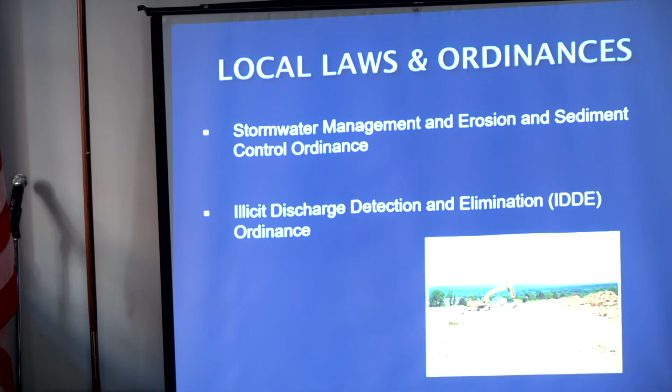Is that still a little fuzzy? Did you figure out where the focus is? No. Aaron, where's the focus? Still seems to maybe, well for us...

Everybody loves the erosion model. Yeah, it was a fun table, right? Having a stream table there.

Okay, you found it. There's like a fine spot, oh right there, right there. That's sharp, it's like very small.

We bought that, you know. So you got here before we put it out, and then couldn't do anything with it. Now we can put it out.

I was hoping they'd give us two polls. Did my signal go through? Then it would be like, yeah, then we would know, differentiate which one was ours.

Walter, how are you? Too bad, hanging in there. Good, thanks.

It wasn't out by last week, it ain't gonna be out till January. You know how that goes, that cycle of things. If they wanna feel real good, it comes out in the end of October. If they don't care, you'll see it in January.

Oh, the mail. I know.

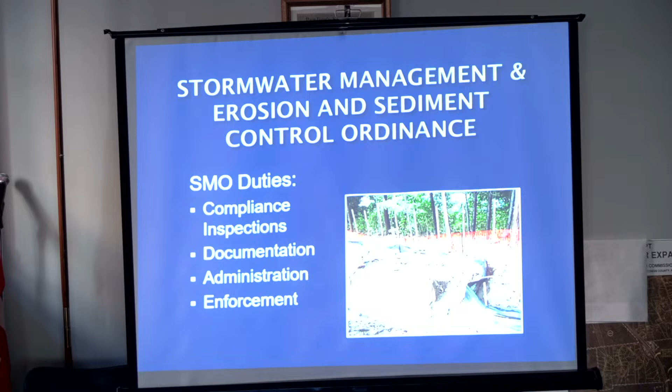As far as SWPPP compliance inspections conducted by the town, the SMO, or the CEO, they are required as per your MS4 permit. However, the frequency is at the discretion of the MS4. It might be based on the scope of the project, whether you have sensitive areas, wetlands, steep slopes, whether it's a large site, multiple phases. In some cases, it may be due to the contractor on site requiring more frequent inspections.

So they may be regularly scheduled, such as weekly or bi-weekly. They could be random after significant rainfall events, or a lot of times it's also the result of a complaint.

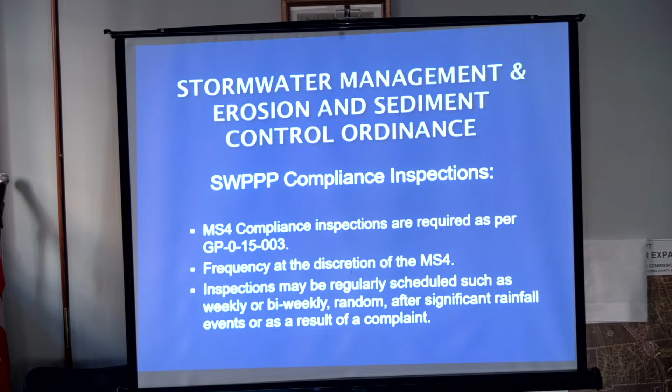Documentation, again, is a big part of this, the MS4 permit while you're doing compliance inspections. That is only going to get, as I stated, more intense as this permit, if we see a new permit sometime probably in 2024.

You're required to document all your compliance inspections. When you come to submit your annual report in June 1st of every calendar year, documentation is required in that as well. And if you are audited by the EPA or the DEC, you'll also have to show that you've documented your compliance inspections or construction inspections.

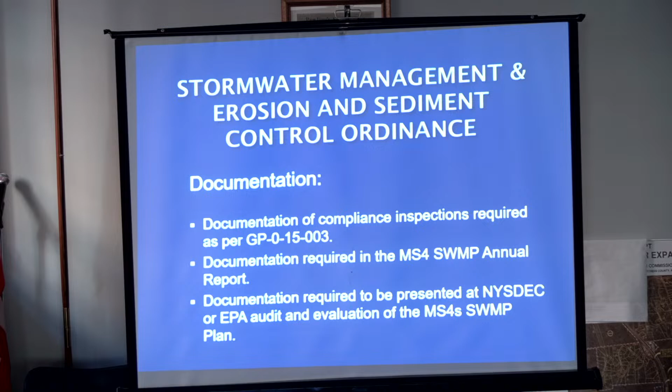You are also, the SMO is also the duly authorized representative. If you're not documented in the Stormwater Management Program annual report as the duly authorized representative, you have to go through what's called an MS4 signatory authorization.

The DEC central office has to have that on file because you're the one that's typically going to endorse an MS4 SWPPP acceptance form, unless in some towns might have an in-house town engineer that might also do this. But in most cases, it is the SMO.

You'll be endorsing the notice of intent, in many cases, the notice of termination. In any endorsement you do, it should be recommended either by your town engineer or your village city engineer or some other consultant.

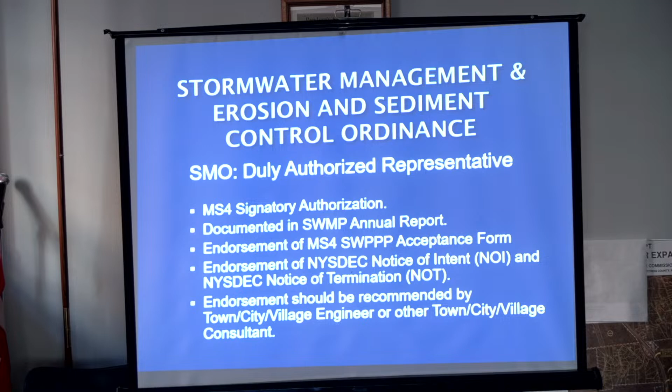This is just a typical, before any project, whether it's a 2-lot subdivision, 200-lot subdivision, commercial site, you should have a pre-construction meeting if it involves a SPDES permit coverage.

I'll just briefly read some of the things that should be in place. You should develop an attendance sheet as far as who's going to be copied on all inspection reports, establish a distribution list, identify the operator's qualified inspector, which I'll talk about as we go on, identify the operator's trained contractor, which I'll discuss as well, identify the operator's contractors, so it might have multiple contractors, they have to sign a contractor certification form, identify the location of the SWPPP box, you have to have a box on site that includes all the on-site documentation, and then you just review all the documentation that has to be in that list there, as everything has to be in that SWPPP box on site.

Then you'll just review the construction sequencing schedule. If any changes are gonna be made, this is the time to make them.

I just was at a pre-construction meeting a month ago. The contractor made significant changes to the phasing plan, and this project is now basically stuck in the mud, so to speak. It's not moving anyplace until such time they submit an amended SWPPP back to the town. It has to be approved, and then they can get started again.

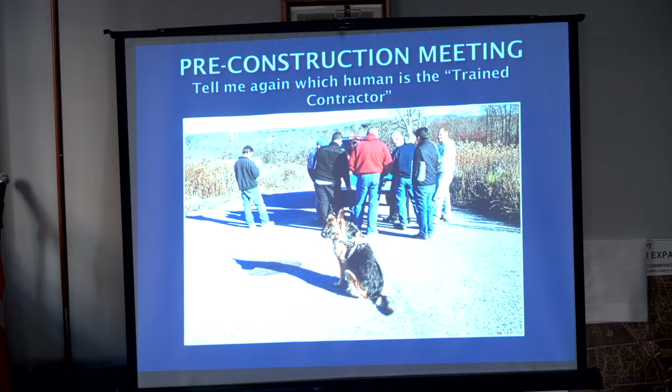For those who haven't seen any of my presentations before, you are going to see my dog in a lot of the photos. She's accompanied me on every site inspection since she's been about 12 weeks old. She's still going out with me now. She's 10 and a half years old now.

Actually, this is the one I was talking about. They changed the phasing plan, and so this project is, right now, I don't know where it's going. We're just waiting to hear back from the applicant engineer. We'll see where it goes.

But this is a large project, a commercial site, there's lots of players. There was probably 20 to 25 people at this pre-construction meeting. It's in the New York City East of Hudson watershed, so you had New York City DEP inspectors there, about a dozen guys from the contracting firm, their engineers, the town engineer, myself, and other people as well. It was a large meeting, you can see they even brought out a table. That was the first time anybody actually brought a folding table to a pre-construction meeting.

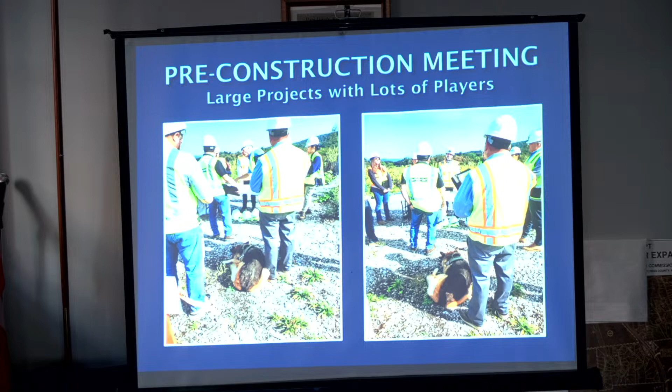So again, pre-construction meeting is very important. The SMO, your directives, that's the way it goes.

Prior to commencing construction activities, many times there's flagged clearing limits. Those need to be checked either by the SMO or your consultant, whoever. Somebody needs to verify those flag clearing limits. It could be limited disturbance, it could be flagged due to wetlands or other site constraints, but that's typically the case. In this instance, it's a large subdivision, another phase, I think this was a 13-acre phase. So we went out and checked all the flags with the map, with the operator and contractors to make sure everything was in line with the plan set.

Your compliance inspections. Basically, when you're doing a compliance inspection, you're checking if all the required documentation is retained on site as per the SWPPP permit. Are all the erosion sediment control measures properly installed? Are they being inspected and maintained properly? Have stabilization measures been initiated in inactive areas of the site?

And what I like to do, and I don't see it done very often, is follow the weather forecast. In many cases, on a lot of the sites that I inspect, if I see a significant rainfall event coming up in 2 or 3 days, I'll just put out a blanket email to everyone: button up your site, we've got a rainfall event coming. I don't see that happening much. It should happen more often. I think that's maybe something that SMO should also take into account. If you know you've got a significant rainfall event coming, just send out an email to all your construction sites, have them button it up.

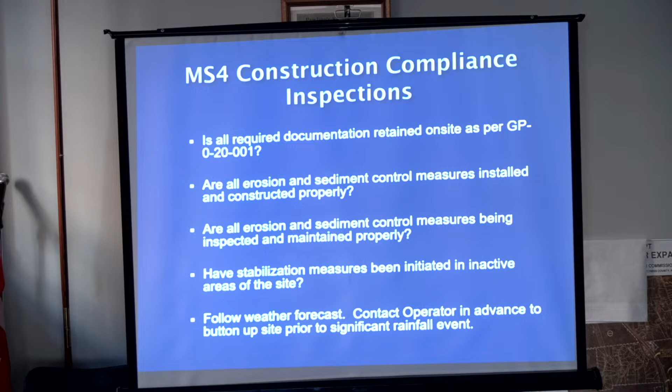What you're also looking at is whether all construction waste materials are being properly managed. You're also checking, is there any evidence of a discharge onto adjoining properties? Is there any evidence of a discharge into the receiving waters or the MS4, could a catch basin of an MS4? Are there any water quality or permit violations observed? And is the site in conformance with the approved site plan or subdivision plan, as well as the approved SWPPP? So you're not only looking at the SWPPP, you're also looking at the subdivision plan as well.

You might see something like, this shouldn't be here, and you might want to bring that to someone else's attention in the town.

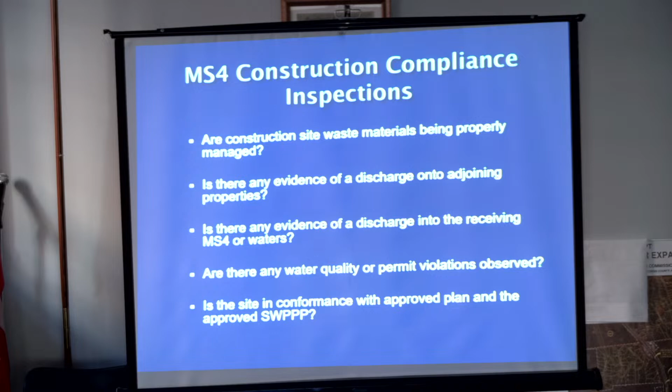I think it's wise to meet with the operator's inspector or general contractor during certain phases of construction. In this case, it was a phase of a larger subdivision where they were going to start putting in infrastructure. So we met out there with the operator's inspector, the contractor, and one of his workers.

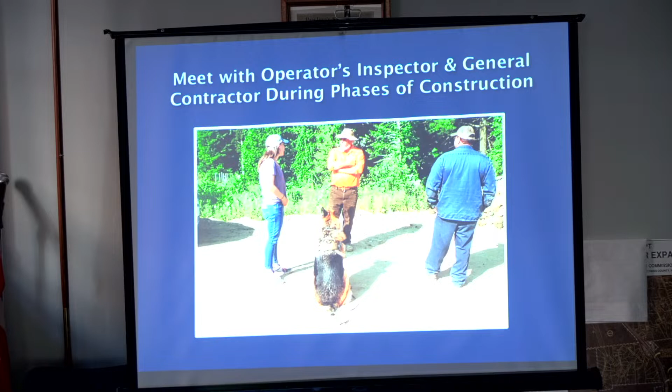Communicate with the operator's contractors during construction. You're out there on the site, communicate with them. In this case, I gave the guy that Rain is sitting next to the good news, but I was waiting for the guy to come down the hill to give him the bad news, like, you need to stabilize quick.

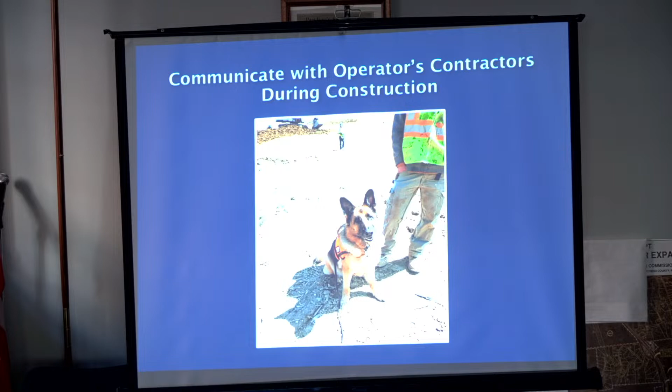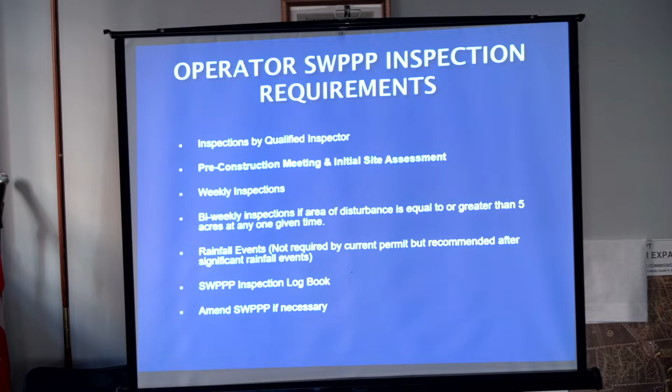It is recommended, if you have a significant rainfall event, that you take a drive out to the site. He's also required to keep a SWPPP inspection logbook on site—basically a book of all the inspections done by the qualified inspector—and again, amend the SWPPP if necessary.

Operator's inspector requirements. According to the latest general construction permit, a qualified inspector is defined as a professional engineer, a Certified Professional in Erosion and Sediment Control (CPESC), or a registered landscape architect. Also able to do the inspection is an individual under the direction of a PE who requires at least 8 hours of erosion and sediment control training.

Then you have your contractor training, which requires at least 1 employee on site, daily, with 4 hours of erosion and sediment control training. This training must be renewed every 3 years.

This contractor training must be endorsed by the DEC. Typically, it's conducted by a soil and water conservation district, or it could also be taken online. It's a little less expensive if you take it at a soil and water conservation district—it can be pricey if you take it online. But in many cases it has to be taken online because they need to get it done quickly, since some towns require this as part of the permit process.

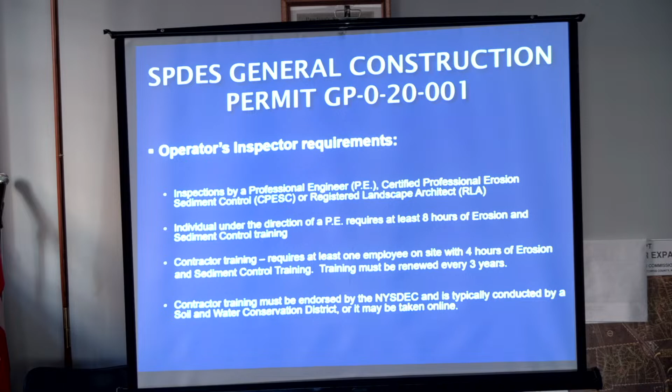Okay, when we get into disturbance of 5 acres or more at any one given time, first of all, it requires authorization. Some people call it a waiver. It's an authorization, same thing, but I call it an authorization.

The permit calls it an authorization. From the MS4, it's at the discretion of the MS4, but it's recommended that the authorization be granted by the planning board during the application and review process, and then it's duly noted in an approval resolution, and then it's kept on site.

I don't think a consultant such as myself or an engineer should just authorize that on their own. I think they should bring it up to the planning board, discuss with the planning board why they think this authorization should be considered, let the planning board vote on it. If they vote in favor of it, then put it in the resolution, and have that resolution on site with that documentation.

Where it gets a little difficult is technical justification is required by the applicant for consideration of the authorization. I'll get into that in another slide.

When that authorization is approved by the town, the MS4, there are different construction permit requirements as far as inspections are concerned. The operator is required to do bi-weekly inspections as opposed to weekly inspections. You're required to do soil stabilization when 7 days of inactive areas with exposed soils, as opposed to 14 days.

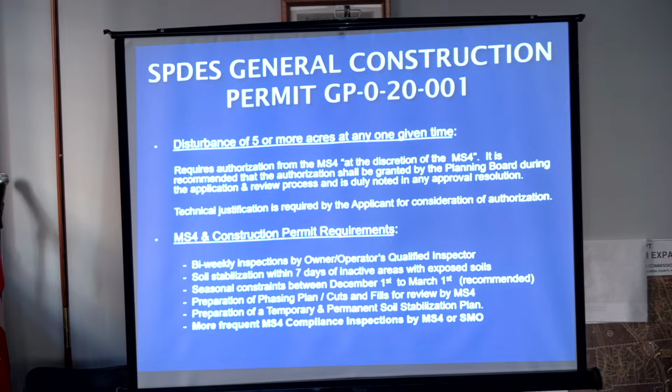Technical justification for land disturbance of 5 acres or more at any one given time: it's kind of a no-brainer if a building footprint is in excess of 5 acres. That's technical justification. Balanced cut and fill for either a commercial site plan or a subdivision plan, golf courses.

If I were to review a site plan now or a subdivision, whatever, I would call DEC first. This is one of their pet peeves, and their definition of technical justification for this 5 acre can fall into a kind of a gray area. So if I was reviewing one now, I would call them to make sure we're on the same page with what I'm reviewing and what I might be recommending to the planning board.

During this process, you want to consider what kind of soils you have, what is the topography, what are the potential pollutant sources, do you have wetlands and water bodies on site?

Additional MS4 requirements and recommendations, and this is in the permit, if you've got more than 5 acres open.

If you've got poor soils, which is typical in Dutchess County in most cases, your sediment traps and drainage swales should be double-sized. You should have sediment traps within each construction phase, and an intermediate grading plan showing all erosion and sediment control measures.

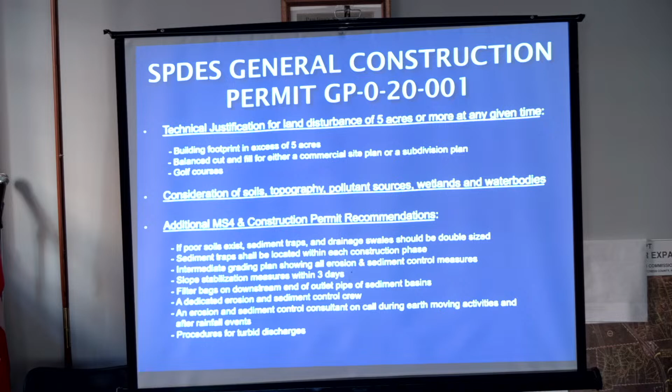This gets back to, a lot of times you have a site that does not require SPDES permit coverage. It just comes in for a building permit. It might be 3/4 of an acre. And typically you just submit a grading plan or a plot plan.

It's reviewed by someone in the town. It might be reviewed by one of your consultants, the town engineer's office, whatever. It should show erosion sediment control measures on the plan. But you have the problem.

Who is doing the site inspections? It's not the operator, he's not required to. And I've seen in many cases over the past 20 years since this permit's been out, more turbid off-site discharges on a single-family residence than on large, very large subdivisions, 200 lot subdivisions or large commercial sites. So a lot of times your single-family resident can be just as difficult as a large site.

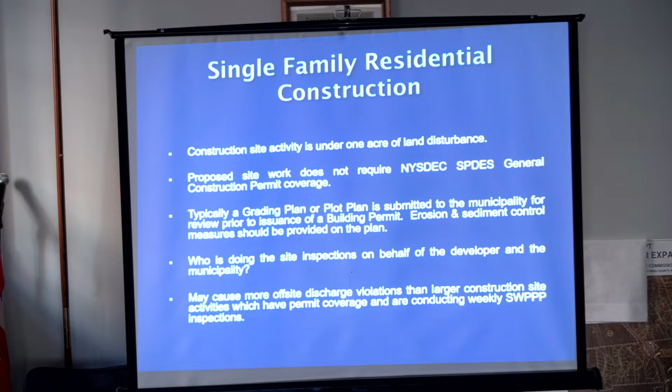Penalties for non-compliance: as the SMO, you're required for enforcement. You can issue administrative orders, an order to remedy, a stop work order. If you're driving around town and just happen to see something, like 2 or 3 acres of exposed soils open that you know nothing about, that requires an immediate stop work order, period. Then you go back and see what's going on, issue the NOV, order to remedy. But it can also include civil actions and criminal prosecutions.

What's most effective in a lot of cases, when it's difficult to get a contractor to get in line to put his erosion sediment control measures in place, is to withhold the footing inspection, an electrical inspection, or the CO. A lot of times that'll get that contractor working faster than a stop work order or an NOV will. You need to use your own judgment in that case.

The DEC has their own penalties for noncompliance, and that's why SMO enforcement is in the MS4's best interest. If the DEC is called for a complaint and comes out on a site in your municipality, more than likely they will provide a written notice of violation. That'll go to the operator, and it will also land on the supervisor's desk. They'll also issue an administrative order on consent, and may issue fines. They always threaten, in the violation notice that goes out, $37,500 per day per violation.

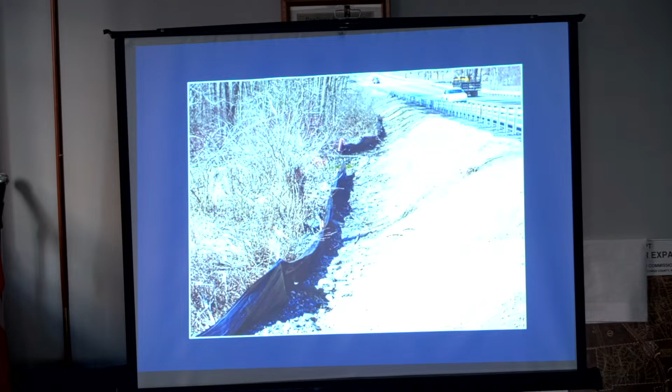That's a wetland on your left side, and the silt fence is obviously in disrepair. The slopes are not well stabilized. It's being used as a barrier, which is not its purpose.

What we did in that case—getting back to utilities—we had a site in one municipality where Central Hudson had left trenches open for about 2 or 3 weeks. We had a significant rainfall event, and the operator's stormwater management basin just got blown out. Inlet protection measures got blown out, sediment traps got blown out, there was sediment all over the road. It was a mess.

I said to the SMO, why don't you try issuing an order to remedy or a notice of violation to Central Hudson and see what happens. She did, and within a day or two we had half a dozen guys from Central Hudson out there. They jumped right on it and restored everything. It really wasn't the operator's fault that it took so long for the utilities to be installed. Central Hudson took it upon themselves, based on that NOV issued by the town, to restore everything, and they did a great job. I've worked with them a lot ever since, and they've really done very well.

Okay, basic erosion sediment control plan. You should know the basics. Your standard is what's called the Blue Book—New York State standards and specifications for erosion sediment control. When you design a plan, you want to control erosion first and then sediment. You have temporary and permanent erosion sediment control measures. You want to control on-site construction and waste materials. You may have phasing and stabilization measures. You should have a construction sequencing schedule, as well as an inspection and maintenance schedule. Construction site inspections are required by both the operator and the MS4 or your SMO.

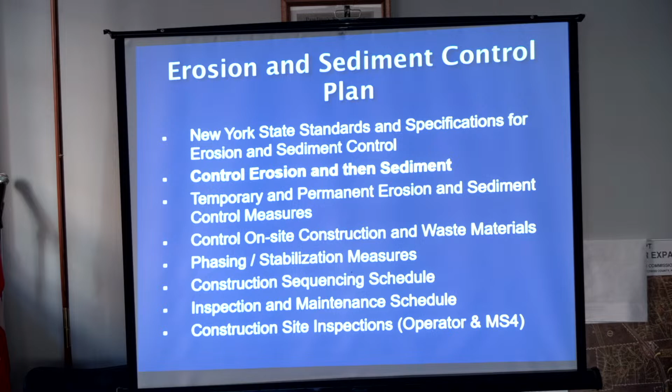I'm basically going to go through quick principles of erosion sediment control. Erosion control is any practice that protects the soil surface and prevents soil particles from being detached by rainfall or wind.

Erosion control is a source control that treats the soil as a resource that has value and should be kept in place. Kind of a no-brainer.

Sediment control is a practice that traps the soil after it's been detached and moved by water or wind. It's more of a secondary measure where erosion control is your primary measure. It's usually a passive system that relies on filtering or settling the particles out of the water or wind. It treats the soil as a waste product that should be removed from its location.

A lot of times you'll see silt fence that's 75% backed up with sediment that should be removed and taken off-site.

What are the factors that influence erosion? Different soil types cause it, and your cover - do you have vegetative cover or not?

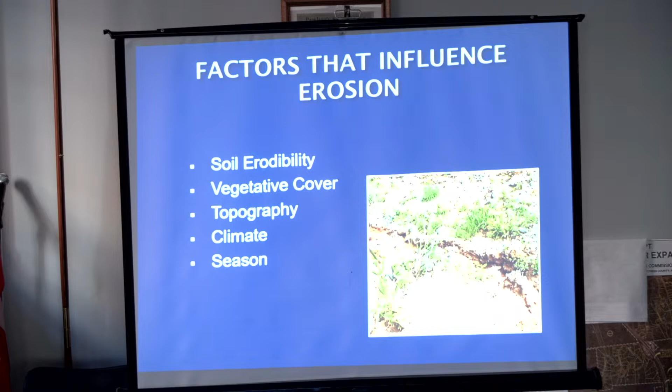The goals of an erosion control plan: first, control erosion and sediment by minimizing the opportunity to be transported or runoff. Contain and trap sediment close to its place of origin. I like to see sediment traps - that's not usually what happens, but I would like to see them more often.

What typically happens on a site is your operator uses his permanent post-construction stormwater management facilities as temporary sediment basins during construction. It's one of my pet peeves, but that's typically what goes on. You want to control erosion at its source rather than just installing perimeter controls to trap sediment.

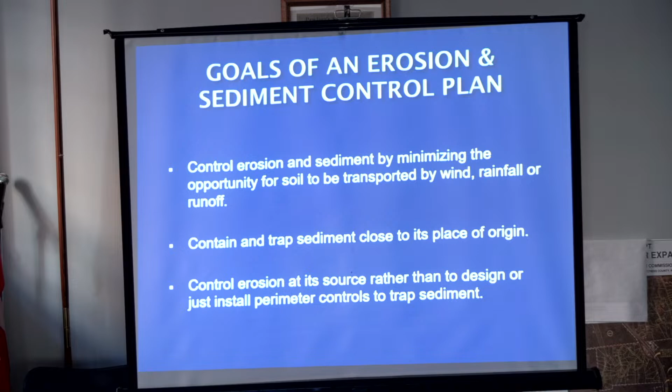Erosion control measures are your primary control - that should be your first measure. Stabilizing soil is the best thing you can do to prevent erosion. You can have diversion swales. Vegetation is by far the best method. There are biotechnical protection measures and rolled erosion sediment control blankets.

Another one of my pet peeves is winter stabilization measures. Usually in my inspection reports I start in September, informing the operator to consider implementing winter stabilization measures before we get into November, which we are now, and they've yet to implement them. Sometimes it just repeats year after year, but you really want to start implementing those measures in September, October. Usually mid-October is the end of your germination window for any seed growth.

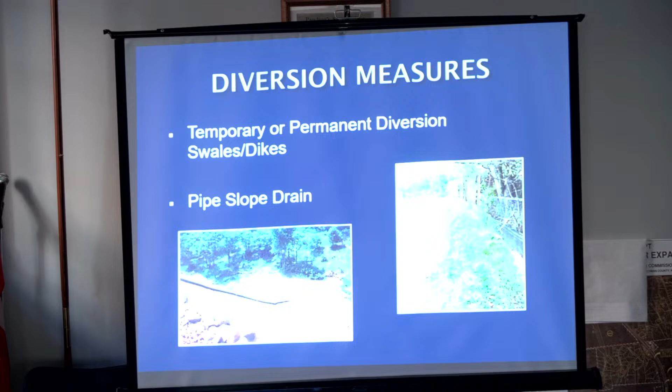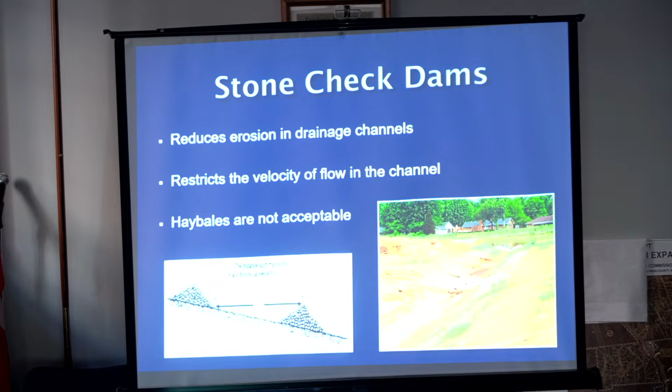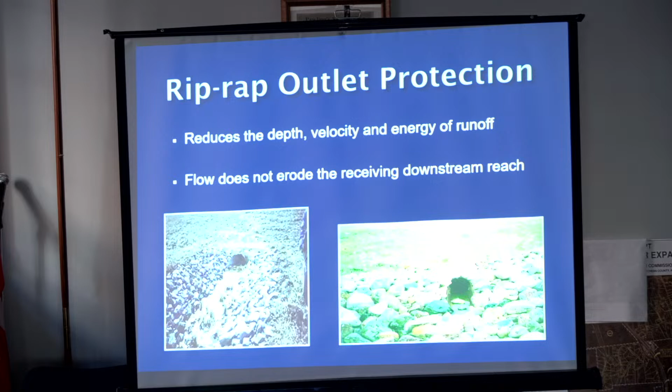Riprap outlet protection reduces the depth, velocity, and energy of the runoff, and it does not erode the receiving downstream reach.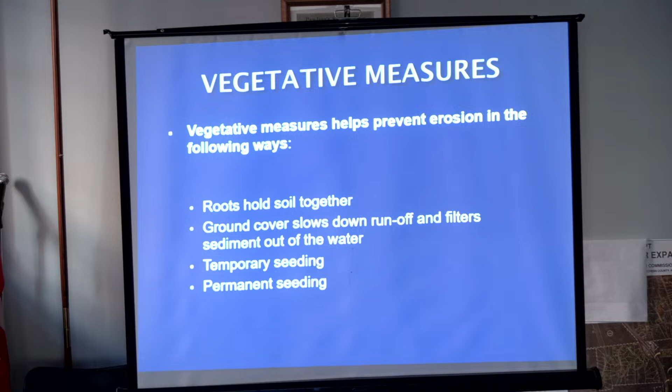Temporary mulches protect the soil from erosion until vegetation can be established. Typically if you're seeding and mulching, the standard is 2 tons of mulch per acre, but during winter stabilization they recommend 4 tons - this is in the New York State Standard and Specifications, 4 tons of hay or straw mulch. Riprap slope protection is another measure you can use.

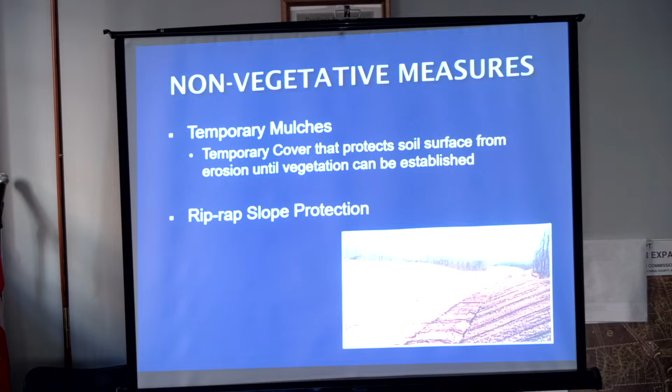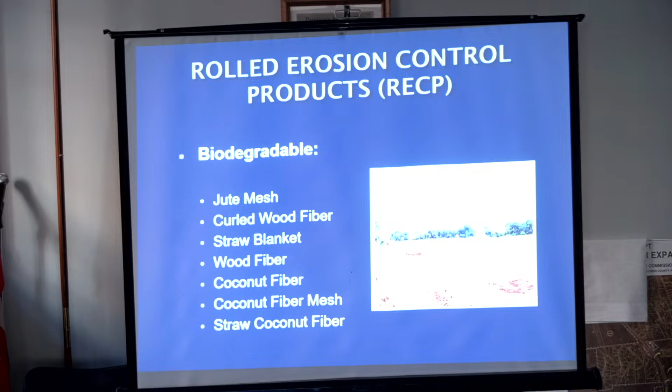Erosion control products - there's a lot of products out now. Biodegradable ones, which I'm seeing used on a lot of sites, and it's actually necessary now as well: jute mesh, curled wood fiber, straw blanket, wood fiber, coconut fiber. You have all kinds of fibers out there that are rolled erosion control measure products. You also have some non-biodegradable plastic netting, plastic mesh. In this case, it's alongside a stream bank with very steep slopes - you really need to hold that soil in.

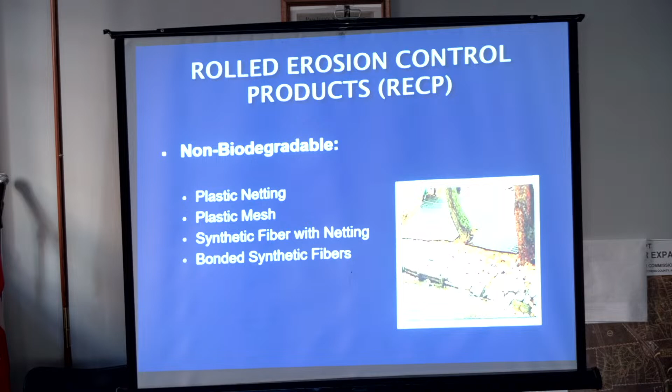Sediment control measures are a secondary measure, and proper installation is key to performance. If it's not installed properly, the sediment's going to go off-site. I like to see temporary sediment traps and basins.

Temporary barriers - what you most often see is silt fence, but I'm starting to see straw wattles now. I actually like straw wattles. I think they're easy to install and hold up better than silt fence. I've given some contractors the go-ahead to use straw wattles in lieu of silt fence, even though the plan may call out silt fence.

Temporary inlet protection. You need a temporary stabilized construction entrance that needs to be maintained constantly to avoid tracking out onto the road. Again, inspection and maintenance is critical.

Going back to inspection and maintenance - the trained contractor that the operator is supposed to have on site should be going around daily checking the silt fence and all erosion sediment control measures, documenting what he fixed and what didn't. I'd say all sites require that, but maybe 5 to 10% of those individuals actually do their job. It falls upon you as the SMO, and you typically end up doing their job for them. The DEC came out with this trained contractor certification that the operator is supposed to have on site, but I see very few of them actually doing the job as the permit states.

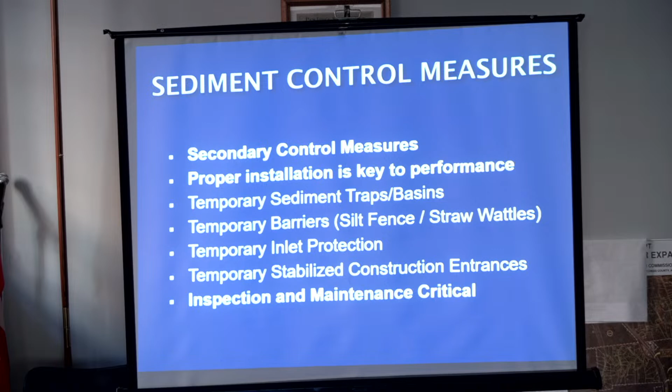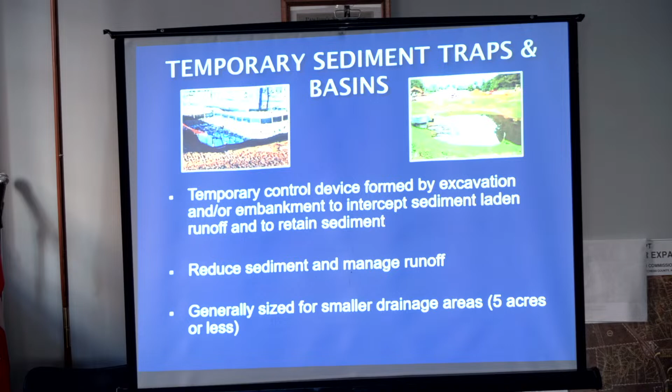Getting back to sediment control measures, we have sediment traps and basins, which I like to see on sites. They reduce sediment and manage runoff, and are generally sized for smaller drainage areas, 5 acres or less.

The storage volume for sediment traps and basins is 3,600 cubic feet per acre of drainage area. It must outlet onto stabilized ground or into a water course, stabilized channel, or storm drain system. Maintenance needs to be performed weekly and after storm events, and once the sediment trap reaches 50% of its capacity, the sediment should be removed.

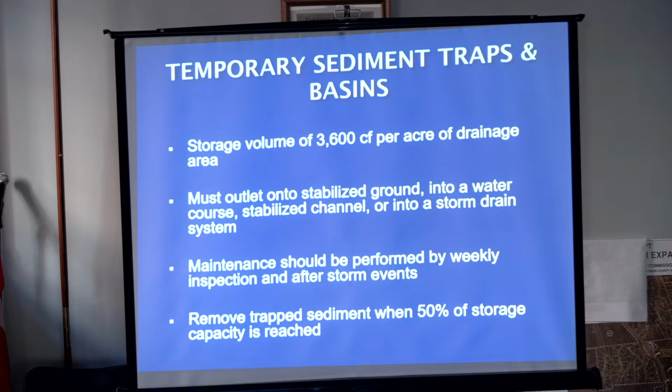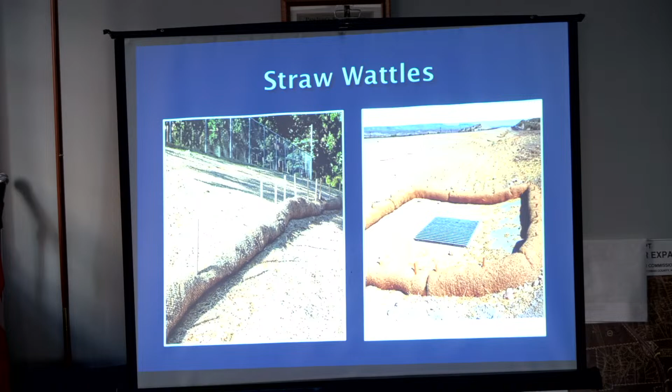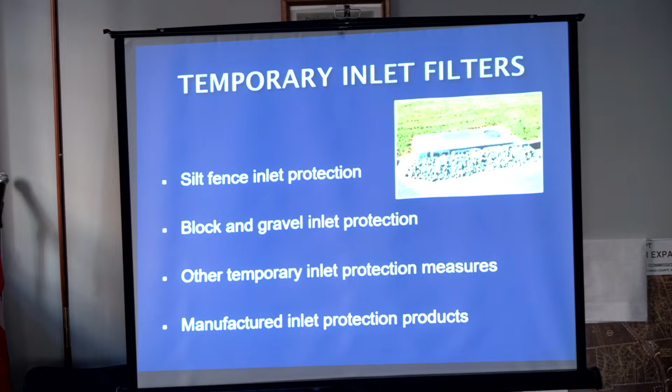Temporary inlet filters on storm drains - this is what's in the DEC manual, but it's not what I really recommend. When the yard drain or catch basin is in the ground and not in the road, typically you'd use silt fence inlet protection. The block and gravel inlet protection, I'm not a fan of at all - it's in the road, hard to maintain, and it washes out. There are a lot of other temporary inlet protection measures and manufactured inlet protection products out there.

For larger sites with a lot of construction activity and vehicles going in and out, especially heavy equipment, you should also have wheel wash facilities on site. The stabilized construction entrances should be maintained almost weekly - they get so dirty. Also, be careful when you walk on stabilized construction entrances not to roll your ankle - I've done that a few times.

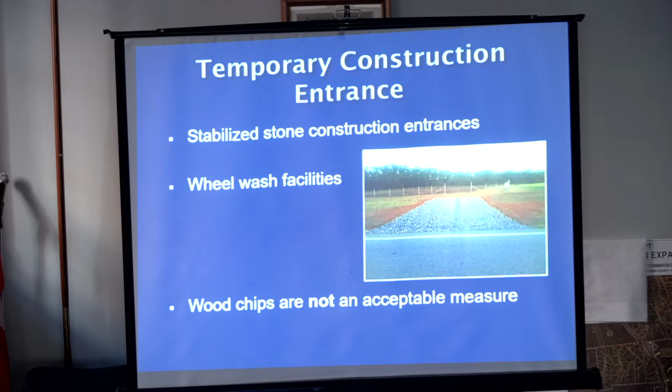Wood chips are not an acceptable measure - some guys will say they're fine for a stabilized construction entrance, but it's not good. Why do erosion control measures fail? Number one, it's failure to follow and implement the plan. In most cases it really comes down to three things: installation, maintenance, and inspection. Have they installed it properly? Are they inspecting it routinely? And are they maintaining it?

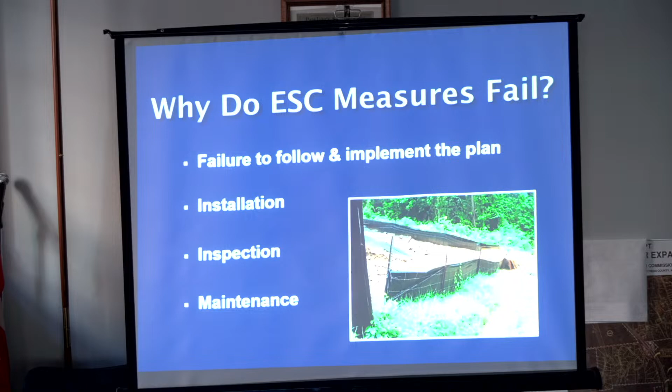Now we're going to go back to when the permit first came out in 2003. We had that 2003 to 2008 implementation period for the MS4. That's also when the construction permit came out, where if you disturbed an acre or more, you were required to get SPDES general construction permit coverage.

At that time frame, there was no SMO from 2003 to 2008. There was nobody on the town's end as far as inspecting these sites, other than maybe your code enforcement officer. So what was happening was, it was kind of like the Wild West. You had this permit out there.

They wanted you to review it at the planning board level in accordance with their permit, but DEC was the one that actually reviewed the plan and approved it. So the approval would come from DEC, not the town. But you were required to review it at the planning board level anyway. It was a weird, convoluted situation.

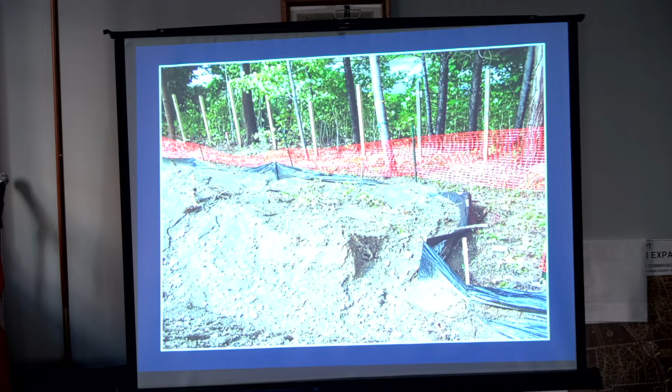And there were no ordinances in place yet. It's not until 2008 when you're required to adopt those ordinances and have a stormwater management officer to enforce them. So a lot of these slides here range from that 2003 to 2008 period, and like I said, it was like the Wild West.

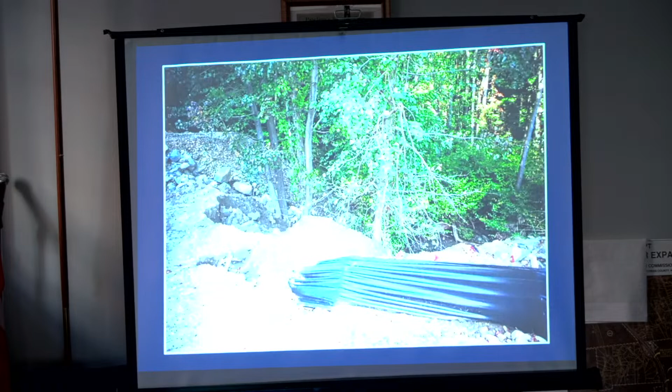You just can't make this stuff up. You don't even know what they were thinking. There was very little training back then. Some pretty bad stuff, I'm telling you, you can't make it up. Not that this doesn't still happen today, but at least now you have someone to enforce this.

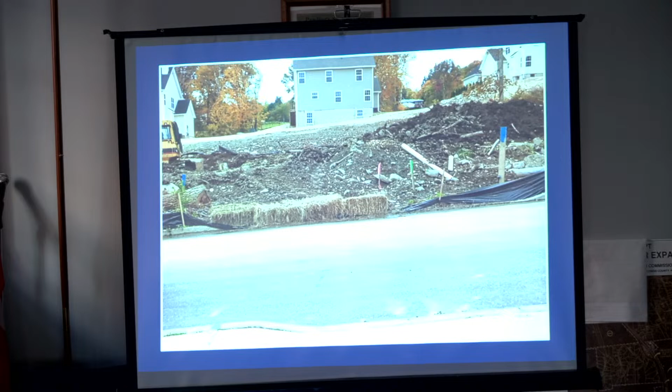Using silt fence to contain boulders. They lost some silt fence area, so they just threw some hay bales in. Never use silt fence at a 90-degree angle - that's a recipe for failure.

This was a really difficult site. I worked for an engineering firm at the time, and we were the operator's qualified inspector. Again, you didn't have an MS4 officer - you just had a code enforcement officer on the MS4 end, and our engineering firm was the quote-unquote qualified inspector. It was a nightmare trying to get this site under control.

You can't even make this up. I still to this day cannot figure out what they were trying to accomplish here. You could just stare at this. It was not pretty, not pretty at all. It was a large contracting firm - I won't name names - but they just really didn't care, no matter what we would write up.

During this time frame, we were writing up all these deficiencies, but there was no incentive for the operator to do anything because there were no ordinances, unless you called DEC on them. That was the only other avenue to go.

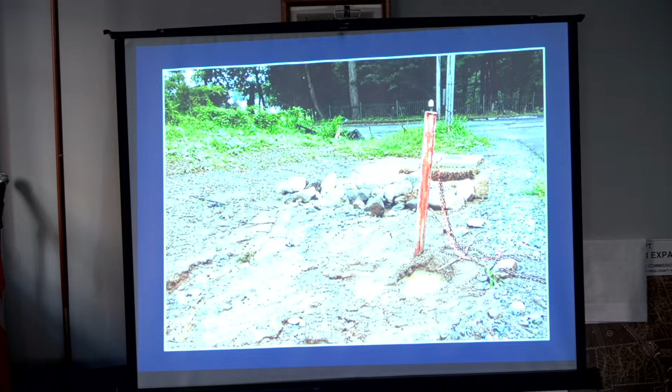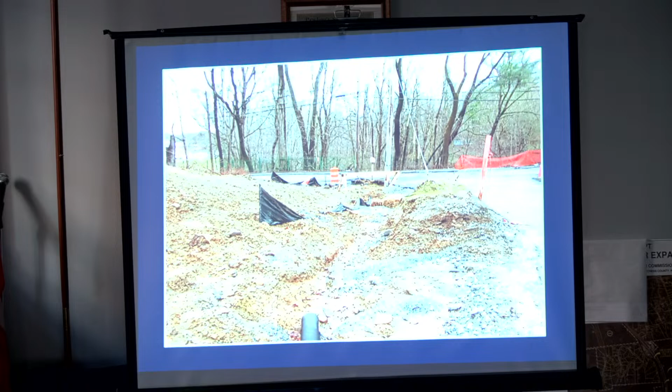This was what they called a stone check dam. I said no, you need to reduce the size of the stone. So then they came back with this pea gravel. I said no, you need to increase the size of the stone.

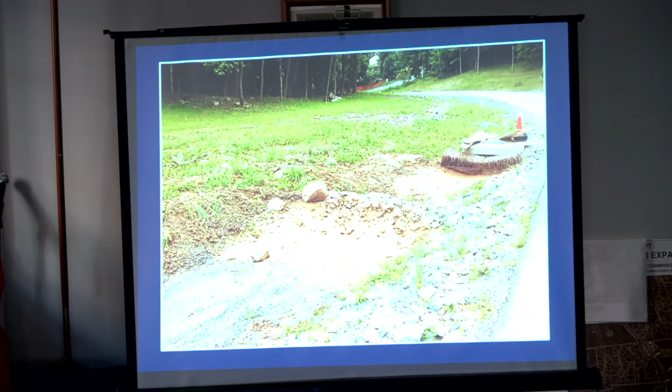During a rainfall event, you can just see the sediment running down the road into an MS4 road again. Rough site, very rough site.

I don't know what they were doing here, but I will give them credit - they did have their little stake in the ground with the little marker at the 50% mark.

This happened to be - I got a call one day - the site totally blew out, went downhill, made a right turn, then made another right turn into a cemetery, and a number of gravestones were just covered in sediment.

I had a planning board meeting that night. It was probably about 95 degrees out, with 95 percent humidity. I was not happy. This is just one area where the site blew out with an open trench, which is one of my pet peeves. This probably goes back to about 2005, during that time frame where nobody was enforcing this. I'm just trying not to get my shoes muddy because I've got a planning board meeting this evening.

Another one of my pet peeves is open trenches. There's no reason they shouldn't be backfilled within 24 hours, 48 hours at the latest. And this is what happens - it's just ridiculous.

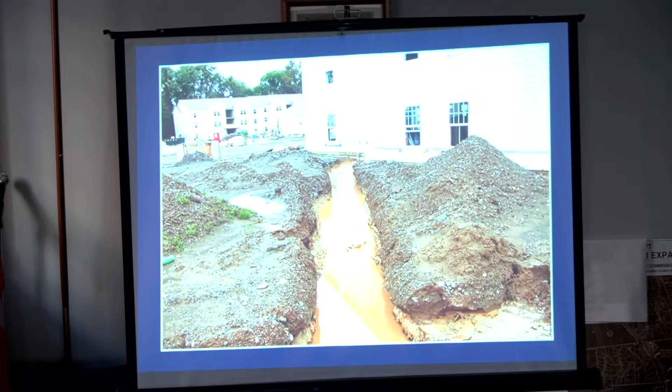Now we have stormwater management officers, we have our ordinances in place. This is a site, again, it gets back to one of my pet peeves where the permanent stormwater management facilities are being utilized as the temporary sediment basin during construction. It's getting all the runoff, so to speak.

This is a shot in the winter, and you can see now what's happened here. It's taken a lot of damage. You also see you got a porta potty about 3 or 4 feet from a catch basin, which is not really a good idea. There's no inlet protection.

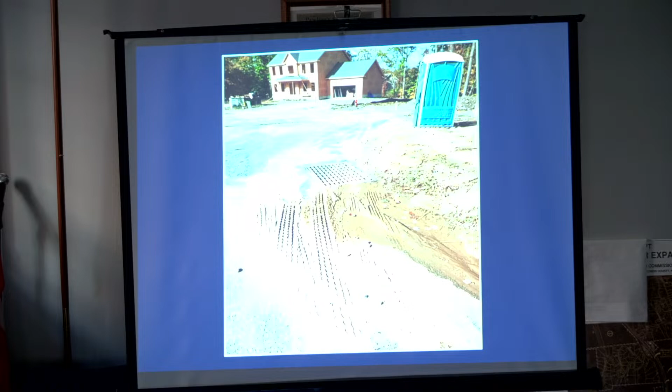Interesting, again, a porta potty, a different site, porta potty next to a catch basin with no inlet protection, but the same contractor. So I thought that was interesting. They did the same thing on 2 different sites in 2 different municipalities.

And this is what it looks like when you start getting the sediment runoff into your conveyance system, your catch basins. This is a product that's frequently used, and this is frequently what you see when you drive through a site that's using them. They don't replace them, they don't set them properly, they just let them rot on site.

This is a large subdivision. And take a look at the road, you can just see it's kind of lined with a nice layer of soil and sediment. Large subdivision, I know there's time constraints, time is money.

What all too often happens is these operators, if you have a 2-inch rainfall event, the next day, they don't care. They're working, they're driving the trucks all over the road, they're driving all the machinery all over the road, and now all your roads look like this.

And now it's going into your conveyance system and back into your permanent post-construction stormwater management facility that's being used as a temporary sediment basin. So another one of my pet peeves is when the soil is really wet, confine your activities, at least try not to be tracking it out into the road.

I'm out here with the operators, inspectors, we're just going through and coordinating all of our comments and directives for the operator.

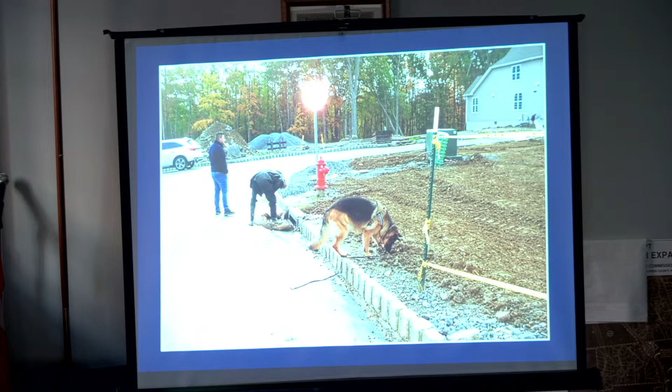This was a site that was brought to my attention. I went out here, saw all this turbid runoff. This is where it was going. This is what it looked like, pretty bad, pretty nasty. It took us a while, we figured it out.

This actually does go back to that 2003 to 2008 timeframe. There was a construction site about a mile or so away that just totally blew out after a major rainfall event. And that was the result.

This was a site, large subdivision. They probably have 10 or 12 large stormwater management basins or facilities. I had gotten a call from the supervisor. This was 2 days after a significant rainfall event.

There's a development, a lakeside development, an older development, about a half a mile to a mile downslope of this subdivision that complained of turbid runoff into their lake. So I was asked by the supervisor to go out and take a look.

And coming down some very steep slopes, basically, it did blow out. You can even see some gully erosion. Their outlet structures failed. Everything blew out.

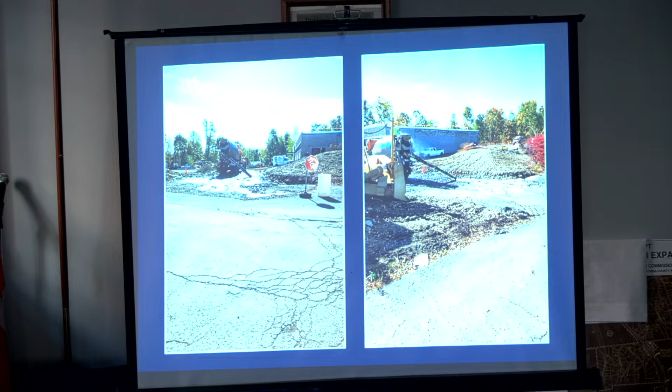This was another large subdivision. This is where you get into the contractor not doing his job. In this case, also, in my opinion, the operator's qualified inspector was not doing their job, because part of their job is to inspect the perimeter of the site, any points of potential discharge around the entire perimeter.

This is a very, very large subdivision. When I'm doing just a compliance inspection, I'm not walking around the entire perimeter of the site typically. I'm just checking to make sure the documentation is on site, making sure your basic erosion control measures are in place, stuff like that. What we had going on here, in the background, is the rail trail.

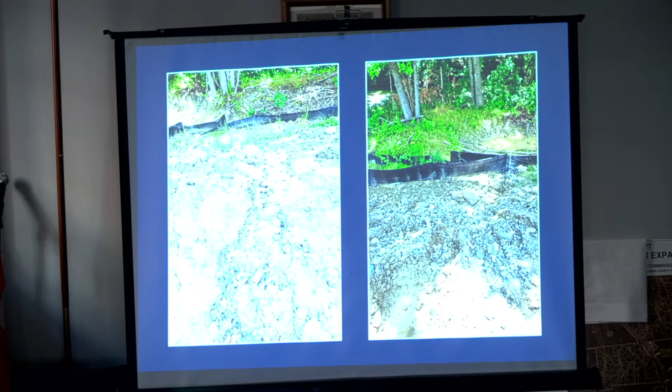You can kind of see it back there. What happened is this site blew out. You can't quite see it, but I'd say about at least 200 feet of rail trail was affected. They have a little swale along the side of the rail trail, here it is back there, and that was totally covered in sediment and soil from this site.

So what was required, again, the county contacted the town. The county was all upset, the rail trail was laden with sediment, and actually some of it went onto the rail trail itself, besides that little drainage swale along the trail. What happened here is the contractor not only had to get his act together and stabilize all its exposed soils, he had to go back and clean out all the sediment from the rail trail and restore the swales.

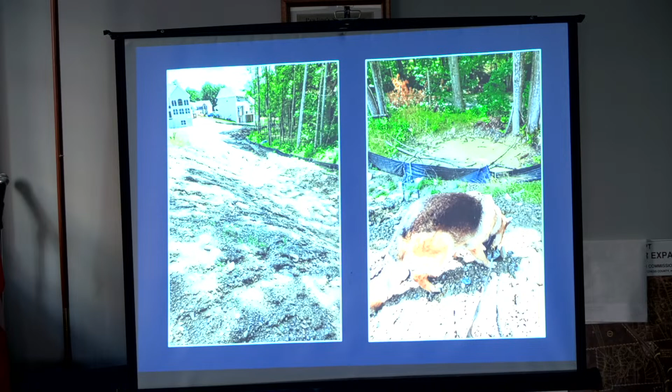And again, that's the same site, the same day.

This is another site in another town. We're getting down to it, 20 years ago they used to say there's not any good land left, you've got all tough sites. Well, 20 years later, it's even more like that. There's not many good sites left, it's either steep slopes or wetlands. This site has a lot of steep slopes, no wetlands, but it's just another one of those tough sites, going in, no matter how good the operator is, there's gonna be problems.

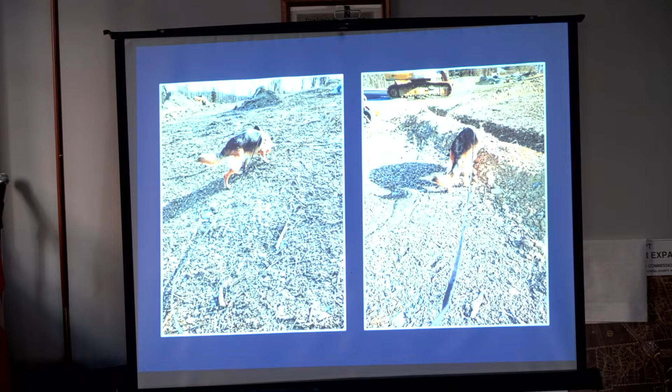So I've just got various slides, different days going out there. Again, those open trenches I don't like, but so far not too bad. Hey, it's looking pretty good, he's getting his erosion control measures in. He's got some rolled erosion control product going down, he's getting germination, seeds coming up, looking pretty good, other than the areas up here that are still exposed.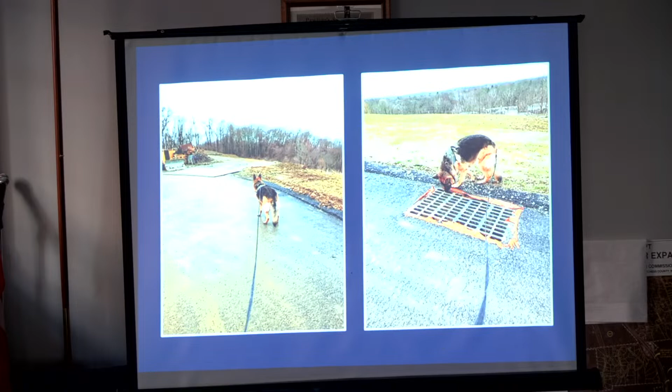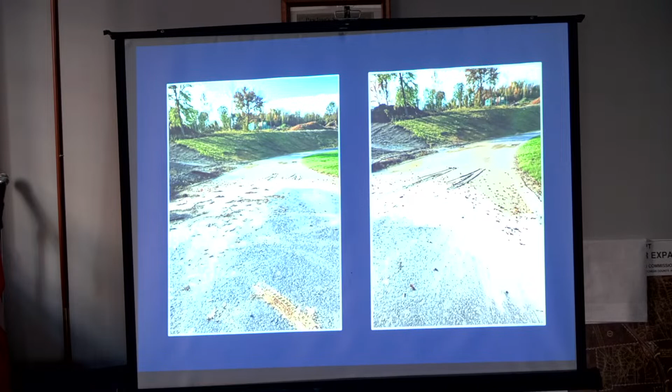Now, on another day, I was just doing a drive-in, and I only pulled up so far because I decided I don't think I'm going to want to go to the car wash and wash out my wheel wells after this inspection. So I pulled back out and parked, and this is all sediment, almost the entire thing, it's not ice, it's sediment.

Someone did think it was smart enough to take a walk through it, but I wasn't going to. And you can see where a large portion was coming off this lot here. And there's their base permanent post-construction stormwater management basin, utilized as usual as a temporary sediment basin during construction.

That was totally... going back to that site, I obviously called it in, a stop work order was issued, an NOV was issued, and an order to remedy was issued.

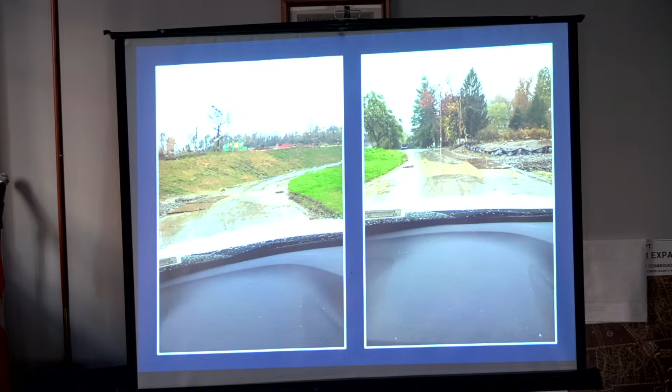This was another day driving in. You can see on the left, I'm driving into the site. On the right, I'm driving out. It does finally have silt fence up over here, but it's totally failed, not installed properly. Again, I called the SMO. Notice of violation, order to remedy was filed.

What happens, and what's hard to take into account, is that when you have these really tight subdivisions on difficult sites, after people build these high-end homes, they also want to build big garages, pole barns, sheds, pools, pool decks, a lot of additional impervious area. So you can probably throw another 10 or 15% impervious area onto a tight site, and this is what you end up with. Now these people, 4 or 5 years or so, are living in these homes, and we're still back at the drawing board trying to figure out how to resolve these issues.

A lot of times you'll run into, most towns have some sort of ordinance regarding getting a grading permit. It may not require SPDES permit coverage, it may not be over an acre. Typically what might trigger it in your ordinance is a change in grade of 2 feet or more, or importation of 200 or 300 cubic yards of material.

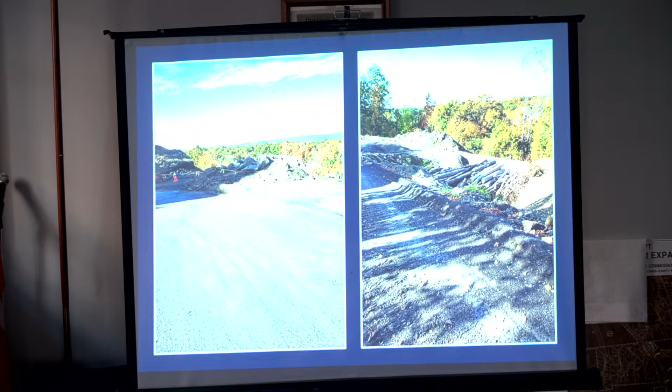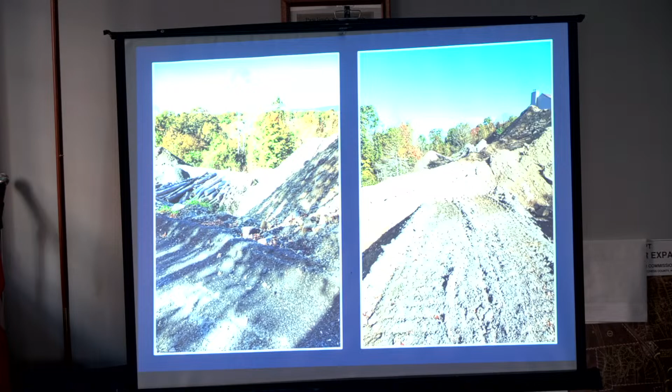So I'm driving into this site. This is an extreme one. I actually wondered - this was probably a subdivision done in the 60s or 70s, something like that - but it's a fairly long cul-de-sac. And I was like, how did it take these people so long to file a complaint with the town? I mean, this is just an enormous amount of material that was brought in, not the best material in the world. I know the source, I won't release the source.

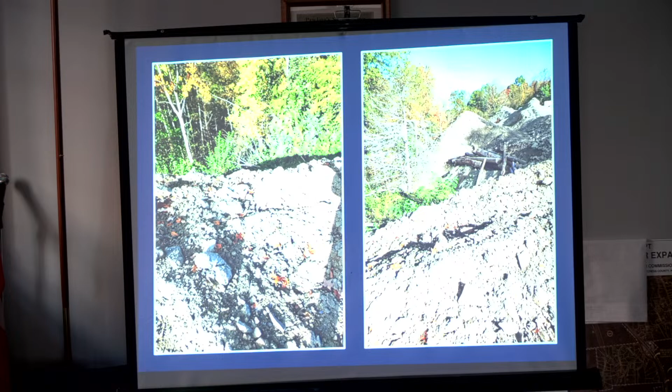It's pretty scary out here. You can see some of these photos. All this material was brought in before, and it took a while for people to complain. In this case it's very dangerous. This also brings on another issue - you have a health and safety issue. Now this is almost a town level, town board issue. What do we do here? We've got a severe health and safety issue. What if some kids go down here?

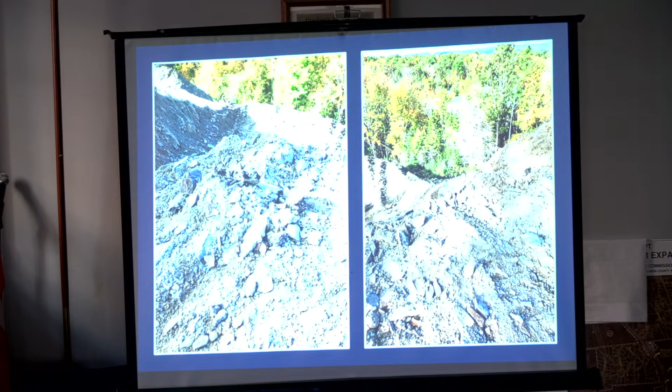But you will encounter this type of issue. It might fall under your grading permit, but now it also falls under your SPDES permit because you're over an acre. But now you also have garbage fill you have to contend with, and what do you do with that?

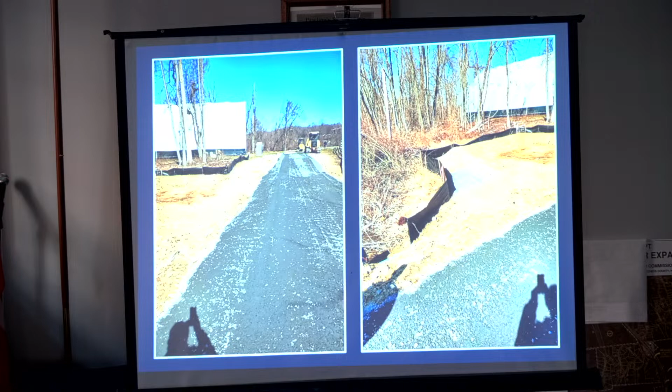But at the end of the day, coming out of this site, they finished up and did a great job. I was dealing with somebody just on the phone, typically in another state. I would go down there and talk with three, four, or five contractors, laborers basically, working outside, and they were doing a great job. As they trenched - this was probably a good half a mile or so in from the road, there was a lot of trenching of that conduit to get to the cell tower - they backfilled every day. Whatever they opened, they backfilled that same day. It was an excellent job, especially since they were coming from different states to get down here. I have more trouble with local contractors than I do with somebody out of state. They did a great job at the end of the day.

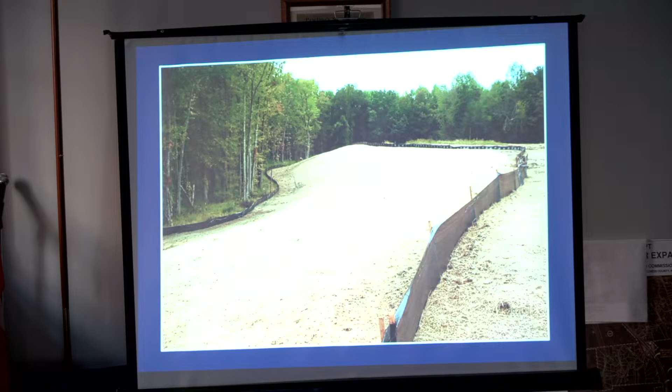There's another one, I try to show some good photos when I can. This was a town project. It was utilized for one purpose and was just being restored back to its natural purpose, so to speak. That's the DEC wetland on the left. A good job was done, it was stabilized well, and the silt fence was installed properly.

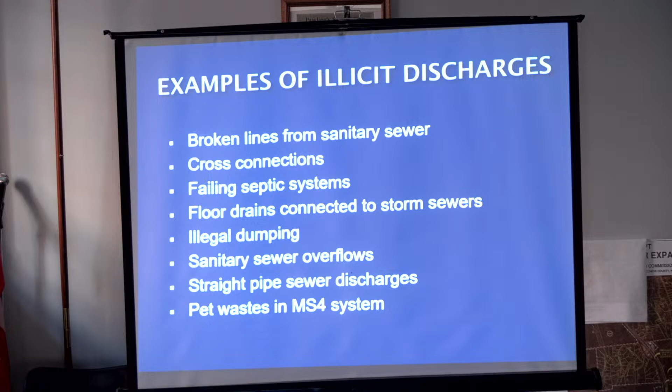Now you have your second ordinance, your illicit discharge detection and elimination ordinance, or IDDE. That's your guideline and responsibilities for enforcement under the MS4 permit, which was also a requirement issued in 2008. Examples of illicit discharges are broken lines from sanitary sewers, cross connections, failing septic systems, floor drains connected to storm sewers, illegal dumping, sanitary sewer overflows, straight pipe sewer discharges, or pet waste in the MS4 system. I've basically seen pretty much all of these during the past 15 years or so.

What are the SMO duties under this ordinance? Again, it's inspections, tracking, documentation, and enforcement. Basically, the idea is if you detect an illicit discharge, you need to try to find its source. It's not always easy, it's usually pretty difficult, but if you do identify the source, then you eliminate the illicit discharge. That's the routine: inspections, tracking, documentation, and enforcement.

With regard to illicit discharges, many times it comes in as a complaint from a resident, or it might just be during a routine inspection. More often than not, it can be your highway department doing their inspections and cleaning catch basins - they'll see something that shouldn't be there, or smell something that doesn't smell right. They should be, and you should be, in contact with your highway superintendent as an SMO. If he encounters something like that, he needs to bring it back to you because now it's your job to deal with that.

During dry weather outfall inspections, that's another time where the highway department or whoever is doing those inspections might encounter an illicit discharge. You need to establish a stormwater hotline. That is a DEC requirement. That should be on your town website. And as the SMO, that should be your direct phone to you.

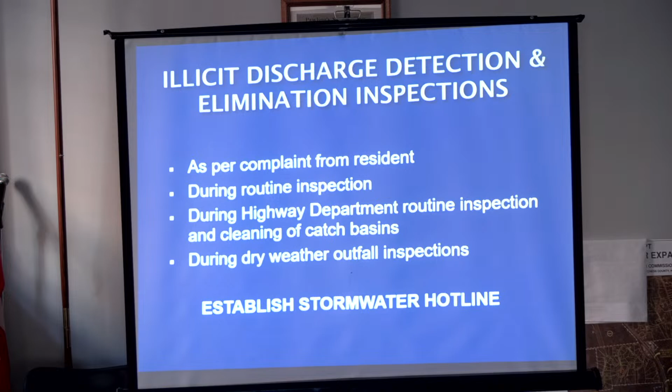So again, when we get to illicit discharges, first you want to identify the likely discharge, trace the source of it, and then document everything. You need to document the determination of the source of the discharge, notify the property owner or the appropriate regulatory authority. It might be the health department, if you have a failing septic, you need to notify them. At the end of the day, the ultimate goal is to eliminate the illicit discharge.

This is an example of a form that the MS4, Dutchess County MS4 committee worked on. We had this available in 2008 for dry weather outfall inspection forms. That's typically done by the highway department. In one municipality, I did have the SMO doing them in his spare time, which was great because they were actually getting done.

The highway department has a lot on their plate, but really they should be doing these inspections. You kind of gotta stay on their case to make sure they get done, because you're required to do 20% of your outfall inspections per year. So if you have 100 outfalls in your municipality, you're required to do at least 20 inspections per year. By the end of that 5-year period, 100% of your outfalls should be inspected. If you get audited, that's one of the things they're gonna be looking for.

Also, you should have on your town website an illicit discharge report form. This is where any resident can just fill out that form and it goes right to the town. It also states that your identity will be kept confidential, so we're not gonna be telling anybody who filed a complaint. But this needs to be there, again, if you're audited, they're gonna want to see that you have this on your website. So if you don't, get something up.

Okay, documentation. Once you detect an illicit discharge, utilize your program, look at your program procedures, utilize your outfall inspection which I spoke about for documentation, typically done by the highway department. If you have time as an SMO, if you have nothing else to do, it'd be great if you went out and did them. Utilize that MS4 illicit discharge report form available on the town website, and utilize that IDDE hotline incident tracking sheet for documentation. The more documentation you have, the better. It's required as per the permit. Even in the annual report, they will ask you how many illicit discharges were detected this reporting period, how many were resolved, how many were eliminated. Again, as I said, at an audit, you're going to have to provide all that paperwork.